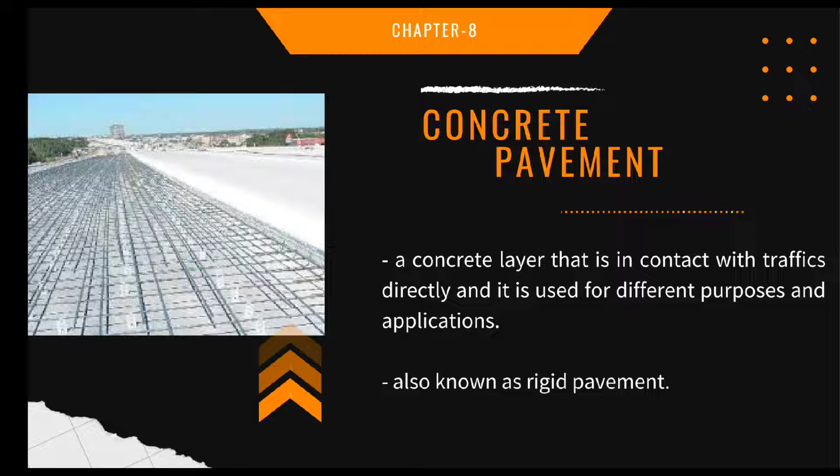Concrete pavement: a concrete layer that is in contact with traffic directly, and it is used for different purposes and applications. Also known as rigid pavement. To add, concrete pavements are used for general paving needs such as driveways, parking lots, and playgrounds.

Next slide please. So we have here the subtopics. First, Portland cement: a combination of limestone, marbles, or other calcareous materials and clay, shale, or argillaceous substances.

So there are different types of Portland cement specified by AASHTO, which means American Association of State Highway and Transportation Officials.

So first, Type 1 or 1A, air-entraining, for general concrete construction when the specified properties of the other four types are not required.

The second, Type 2 or 2A, air-entraining, for general concrete construction exposed to moderate action or where moderate heat of hydration is required. Third, Type 3 or 3A, for high strength concrete. Type 4 for low heat of hydration, and Type 5 for high sulfate resistance.

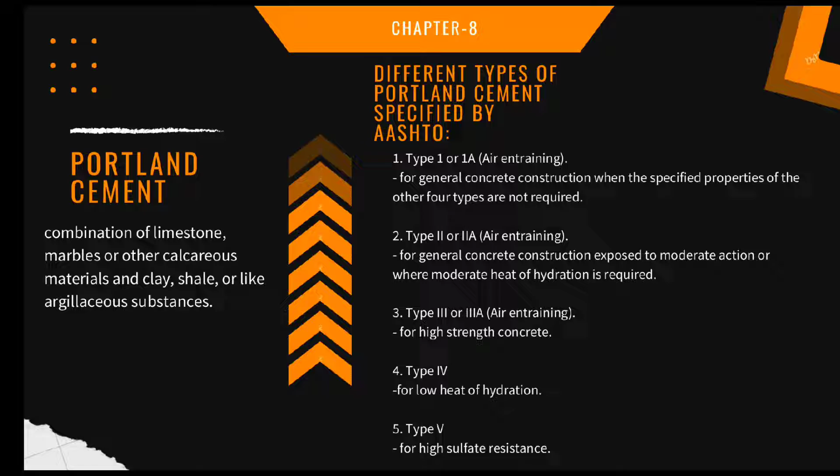Next slide please. So we have here a table showing the composition and strength characteristics of various types of Portland cement. This table you can see in our PDF, you can check it there to familiarize yourselves properly with the table.

So we have the types of cement, compound percent, strength normal, Portland cement concrete percent, in days and months. Just check it in my PDF for clarity and better familiarization.

So our notes here state that Portland cement constitutes the following chemicals: tricalcium silicate, dicalcium silicate, tricalcium aluminate, and tetracalcium aluminoferrite.

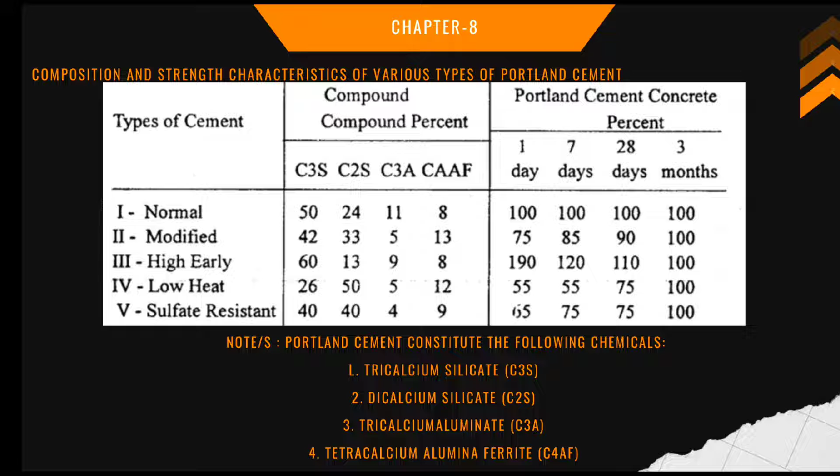Next slide please. So now we will move to the concrete pavement characteristics and behavior. First, the behavior of concrete pavement that is exposed to loading and environmental effects entirely depends upon the quality of concrete, the underlying subgrade, and the base course.

Generally, concrete is strong in resisting compression load acting on it, but considerably weak in resisting tensile stresses. The reaction and movement of the subgrade supporting the slab affects the stability of the concrete pavement.

Concrete, like other materials, also expands and contracts due to temperature changes. It expands when wet and contracts when dried. After pouring, concrete shrinks as the mortar hardens, as the cement hydrates.

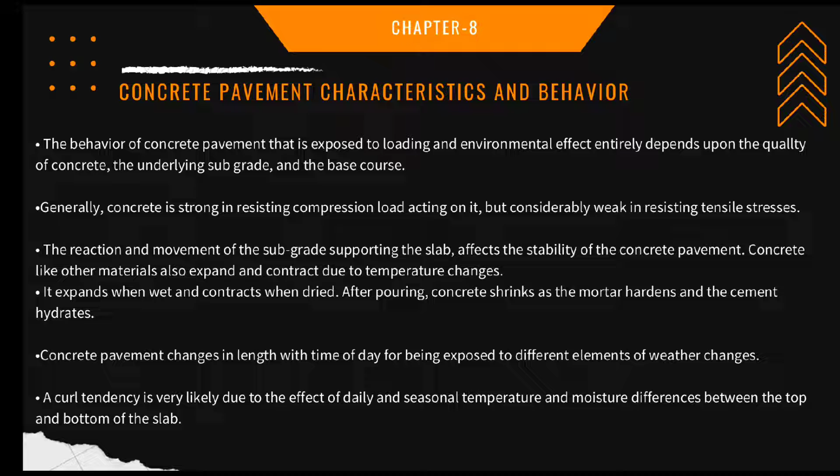Concrete pavement changes in length with time of day due to being exposed to different elements of weather changes. A curl tendency is very likely due to the effect of daily and seasonal temperature and moisture differences between the top and bottom of the slab.

Next slide please. Concrete pavement design assumes the following considerations. Number 1, that the pavement slab was designed as plain concrete beams. Number 2, that transverse cracks on the concrete pavement cannot be avoided.

The designer, however, presumes that the pavement cracks could be controlled by providing reinforcements to the slab joints with the following assumptions. So these are the sub-statements here.

A. With reinforcements, cracks on the slab will be confined to a weakened plane joint spaced at 4.50 to 6.00 meters distance. Vertical offsetting across the narrow cracks will be prevented by aggregate interlock or by dowel bars.

Third, with simply reinforced slab, cracks will only appear at weakened plane joints spaced at 12 to 20 meter intervals. Hairline cracks are held tightly by the steel between joints.

With continuous reinforcement, transverse joints are omitted. Hairline cracks are checked by the steel and develop at close intervals.

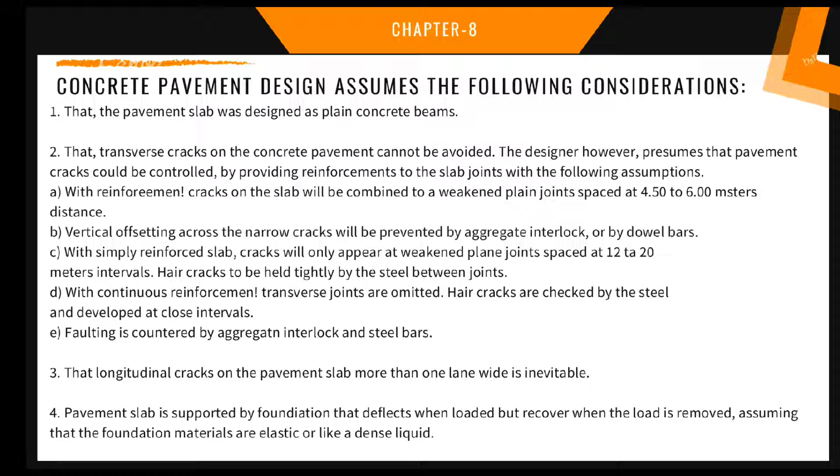So now we have here control of cracks. Load transfer and anti-joint alignment is sometimes dependent solely on aggregate interlocking. If the joint opening is considerably small, from 0.03 to 0.04 inch, the projecting aggregate is considered tightly keyed, and when the edge of one slab deflects due to load, the adjoining edge will also be forced down.

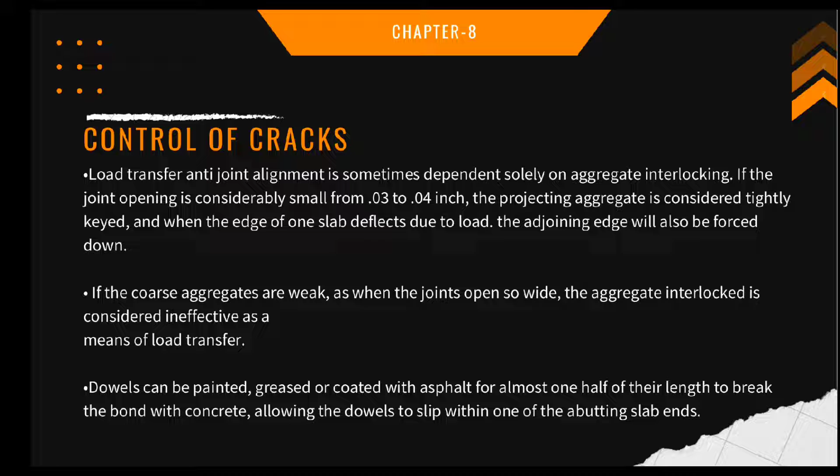Okay, next slide please. So now we have here the transverse expansion joints. Expansion joints provide space allowance for the lengthening of the slab due to expansion.

So we have here another table, the recommended dimensions of dowels for concrete pavement joints. You have here pavement thickness in centimeters, dowel diameter in millimeters, dowel length in meters, and dowel spacing in meters. Source: Interior Guide and Proposed Revision, 1980.

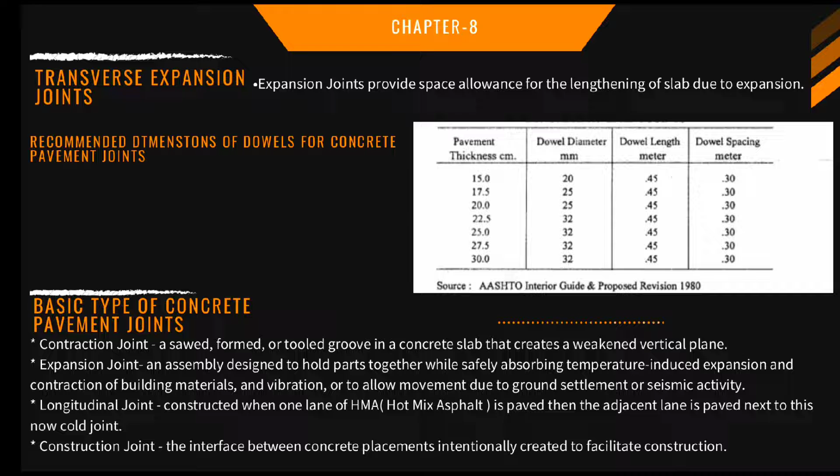So next slide please. This time I will be explaining to you more about longitudinal joints.

Longitudinal joints are provided between adjacent traffic lanes. It is considered as a hinge to provide edge support but allows rotation between the slabs. By this joint, flexural stresses that might cause irregular cracks along the length of the road are relieved or neutralized.

So longitudinal joints cannot be considered as a major problem under the following assumptions, six in total. First, that there is no big load transfer across it.

Second, that the expansion and contraction movement developed across the pavement width is very small. Third, when lanes are constructed at different times using side forms, the joints are provided with keyways in the first slab to accept load transfer.

Fourth, for longitudinal joints, deformed tie bars are used because the purpose is to hold the slabs tightly together rather than to allow the joints to open and close. Fifth, the diameter and spacing of tie bars are based on the force needed to pull the narrow pavement slab over the subgrade to the joint.

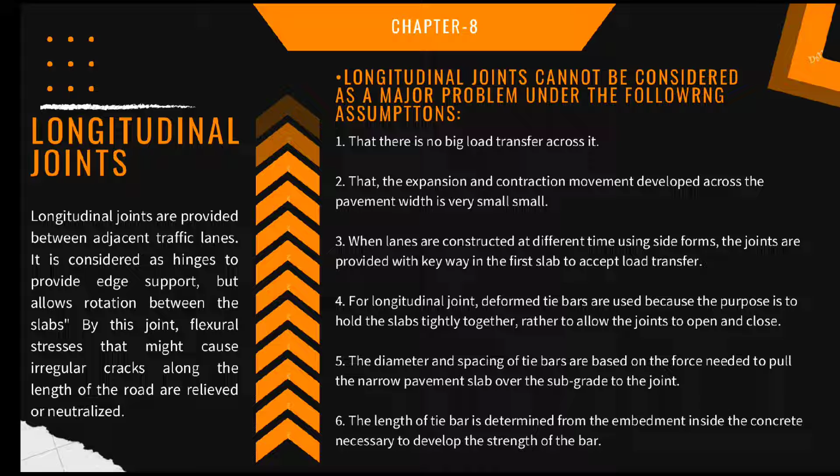Now, moving on to the 10th slide, we have here the recommended tie bars for longitudinal joints in concrete pavement, 3.60 m lane width.

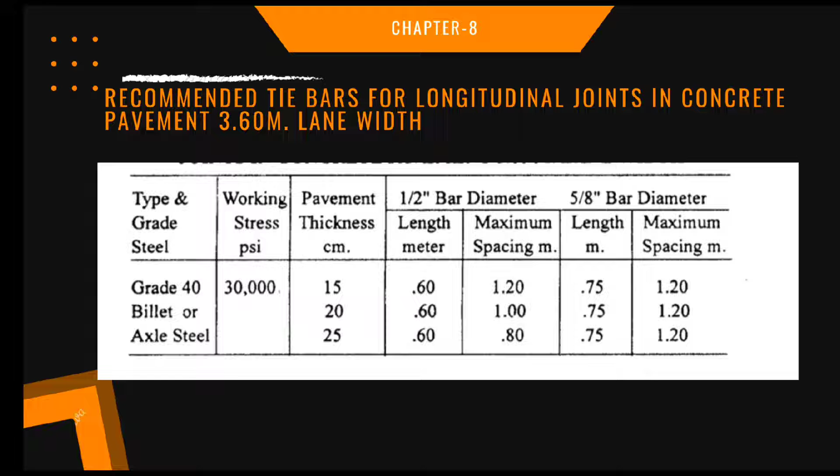Thank you, Mr. Gonzon, and hello everyone. I am Rashid Kaiser O. Kiamko. I am going to discuss first about construction joint.

What is construction joint? Construction joint is the interface between concrete placements, intentionally created as a construction joint. If concrete pouring will be interrupted for quite some time, that cold joint will be inevitable. This practice is to provide transverse construction joints.

Deformed tie bars are used to hold the joint tightly closed together. However, if the construction joint replaces a contraction joint, the use of dowels is an alternative. Construction joints and cracks should be cleaned and sealed to prevent infiltration of water to the subgrade and keep dirt out of the joints. Now, let's move on to reinforcement of joints.

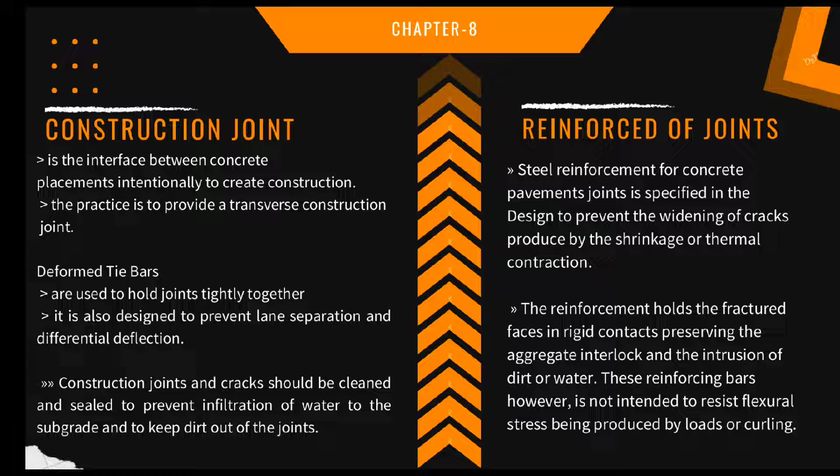Steel reinforcement for concrete pavement joints is specified in the design to prevent the widening of cracks produced by shrinkage or thermal contraction. The reinforcement holds the fractured faces in rigid contact, preserving the aggregate interlock and preventing intrusion of dirt or water. This reinforcing bar, however, is not intended to resist flexural stress produced by loads or curling. We won't dig too deep into this topic since it's more on calculation. Let's proceed to the next one.

Let's move on to the subgrade and subbase for concrete pavement. The construction standard for subgrade and embankment are precise and almost typical for all pavement types. Under concrete pavement literature, the undercourse or selected material is always imposed between the subgrade and embankment of the concrete slab. AASHTO recommends that the subbase must be extended from 30 to 60 cm outside the pavement edge to serve as edge support.

Cement-treated asphalt is recommended for the heaviest travel facility because it increases the fatigue life and reduces joint failures. The wide acceptance of stabilizing the subbase with Portland cement concrete pavement is due to investigation results of pumping of concrete slab. This pumping is all about the ejection of water and subgrade soil through the joints and cracks along the edges of the concrete pavement.

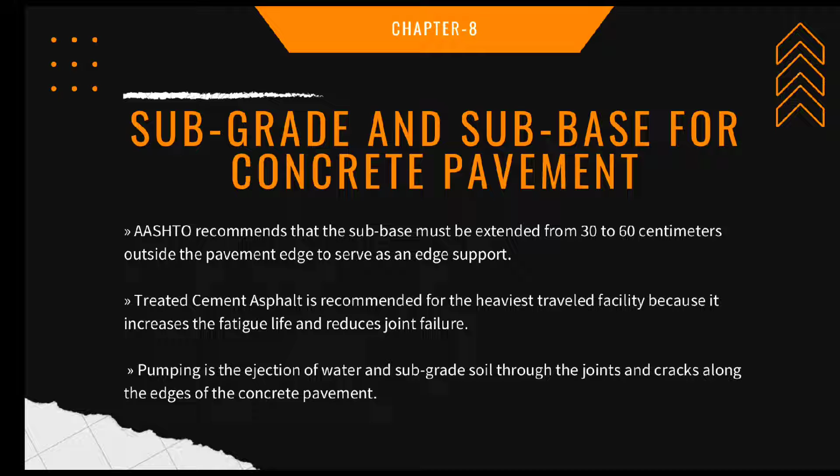Let's move on to concrete proportions. In concrete proportions, we have fundamental rules to follow so we can obtain good concrete. First, type 1 or 2 cement is specified for concrete pavement. Second, water for concrete must be clean, free from acids, alkali, and oil. Water suited for drinking purposes is acceptable for mixing cement, except water containing a large amount of sulfate.

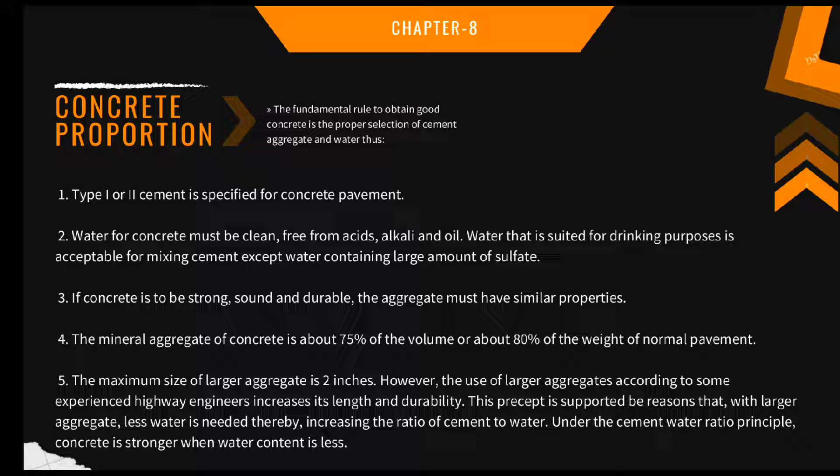Third, if concrete is to be strong, sound, and durable, the aggregates must have similar properties. Fourth, the mineral aggregate of concrete is about 75% of the volume or 80% of weight of normal pavement. Fifth, the maximum size of coarse aggregate is 2 inches. However, the use of larger aggregates, according to some experienced highway engineers, increases its strength and durability. This is supported by reasons that with larger aggregates, less water is needed, thereby increasing the cement-water ratio. Under the cement-water ratio principle, concrete is stronger when water content is less.

So let's move on to admixture. Admixture is a substance added in mixing to change the characteristic of a concrete mixture. There are varieties of admixtures available like air entraining admixture, which is very common. Others like water reducer, retarder, accelerator, pozzolan, and plasticizer are also used.

The next one is air entrainment. Air entrainment is the entrapment of air in the concrete mixture in the form of evenly distributed small bubbles. It is used to increase the concrete's resistance to surface scaling caused by de-icing with calcium or sodium chloride. Another advantage of air entrainment is improving workability and reducing bleeding in fresh concrete.

The effectiveness of air entrainment in increasing concrete durability is influenced by: number 1, percentage of air present in the mixture; number 2, grading of aggregates; number 3, size and distribution of air bubbles. Air entrainment in concrete may be attained by using air entraining Portland cement or by air entraining admixture added to each batch of concrete while mixing.

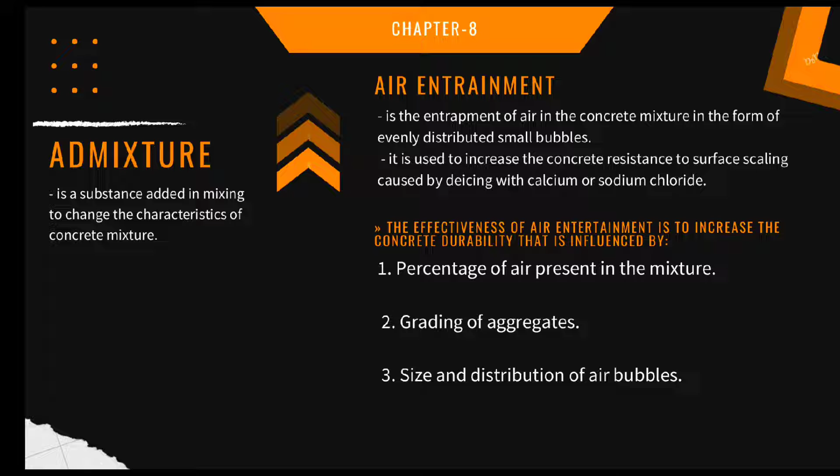Let's move on to the cement water ratio. As mentioned earlier, the strength and other desirable properties of a concrete mixture vary depending upon the ratio of cement to mixing water. A non-air entrained concrete with a water cement ratio by weight of 5 gallons of water per bag may have compressive strength about 5,300 psi in 28 days. On the other hand, a concrete mixture with 7 gallons of water per bag of cement develops strength of only 3,700 psi in 28 days.

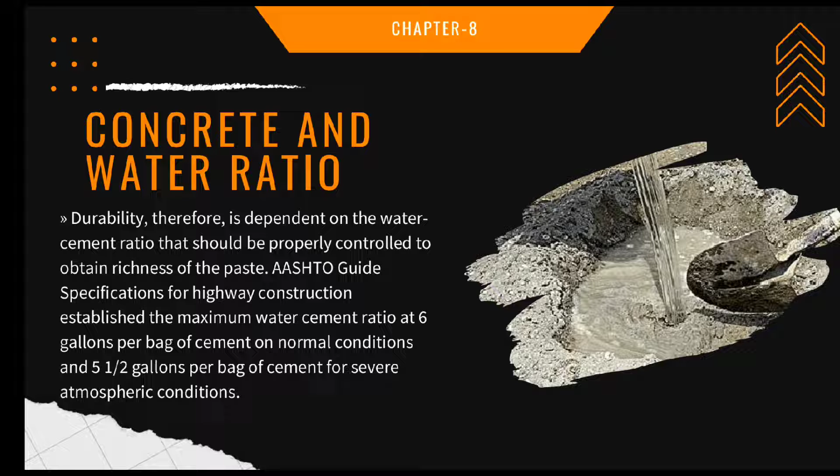Therefore, durability is always dependent on the water cement ratio, which should be properly controlled to obtain richness of the paste. AASHTO guide specifications for highway construction establish the maximum water cement ratio at 6 gallons per bag of cement for normal conditions, and 5.5 gallons per bag of cement for severe atmospheric conditions.

Let's move on to my last topic, which is the concrete mixture. Considering the high cost of cement, the objective in mixing concrete is to use more aggregates and as little cement as possible while maintaining the workability necessary for successful pouring and consolidation.

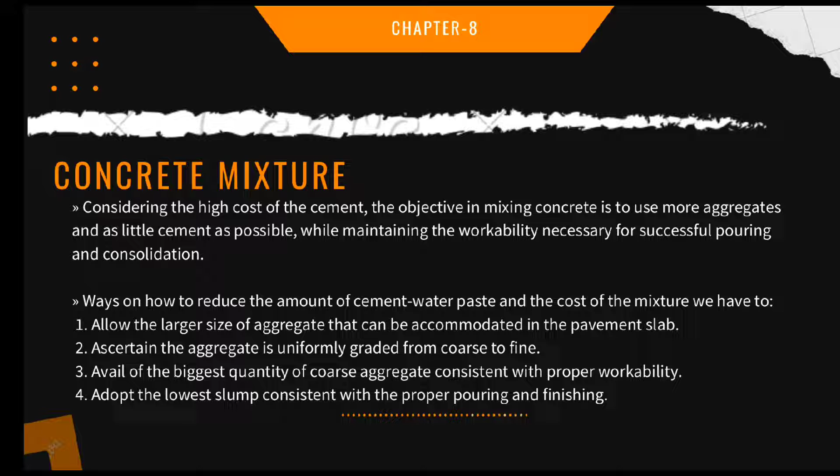So we have ways here on how to reduce the amount of cement water paste and the cost of the mixture. Number 1, allow the larger size of aggregate that can be accommodated in the pavement slab. Number 2, ascertain that the aggregate is uniformly graded from coarse to fine. Number 3, avail of the biggest quantity of coarse aggregate consistent with proper workability. Number 4, adopt the lowest slump consistent with proper pouring and finishing.

Another way of testing the consistency of concrete is the Kelly ball method. The Kelly ball method uses a metal cylinder 15 centimeters in diameter and 12 centimeters high with a hemisphere bottom shape, weighing 14 kilograms. A graduated handle rising from the top of the ball is placed on the surface of the fresh concrete. Its penetration is measured by comparing its position with that of the frame.

The advantage of the Kelly ball method is that a reading could be taken immediately on the concrete being poured on the roadway. On the contrary, the slump test requires more time but could be conducted on selected samples.

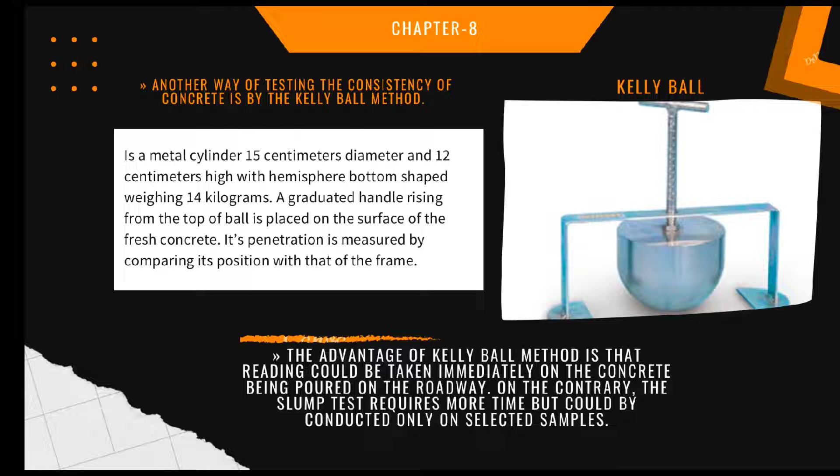Polymer concrete. Polymer concrete could be used alone or in combination with Portland cement to bind aggregates together, producing concrete. There are three types of polymer mixture. Number 1 is polymer impregnated concrete or PIC, which is a Portland cement concrete impregnated with monomer after curing. Number 2 is polymer concrete or PC, which is a mixture of polymer binder and aggregate. Number 3 is polymer cement concrete or PCC, which is a pre-mixture of cement paste and aggregate wherein a monomer is mixed before curing.

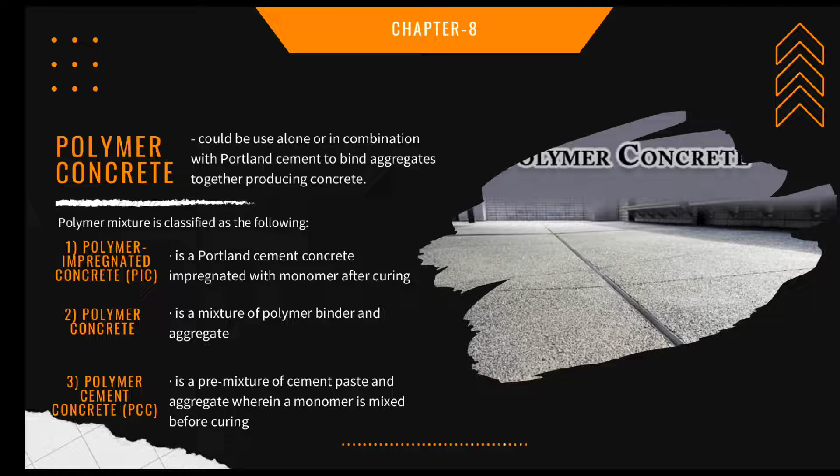Curing of concrete pavement. A newly placed concrete pavement needs curing. Curing may be accomplished by several methods, which could all be categorized into two. Number one, methods that keep the surface constantly wet or cover it with water absorbent material that is rewetted from time to time. Number two, methods that prevent evaporation, so that the water already in the concrete is retained and sufficient for hydration.

Fine aggregates consist of natural sand, stone screening or other inert materials with similar characteristics. Fine aggregates from different sources of supply should not be mixed or stored in the same pile. They should not contain more than 3 mass percent of material passing the 0.075 mm or number 200 sieve. Use of beach sand will not be allowed without approval of the supervising engineer. If the fine aggregate is subjected to 5 cycles, weight loss should not exceed 10 mass percent.

Coarse aggregate shall consist of crushed stone, gravel, blast furnace, and slag. It should not contain more than 1 mass percent of material passing the 0.075 mm or number 200 sieve, or more than 0.25 mass percent of clay lumps, or more than 3.5 mass percent of soft fragments. Coarse aggregate slag density should not be less than 1,120 kg per cubic meter.

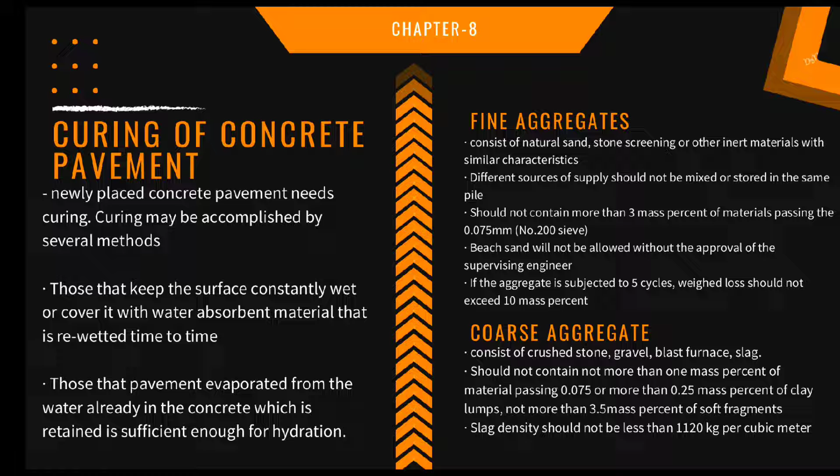Water used in concrete mixing or curing should be clean and free from oil, salt, acid, alkali, and grass. Joint fillers should be mixed asphalt and mineral or rubber filler. Storage of cement and aggregate should be waterproof with a raised floor from the ground to protect from rain or dampness.

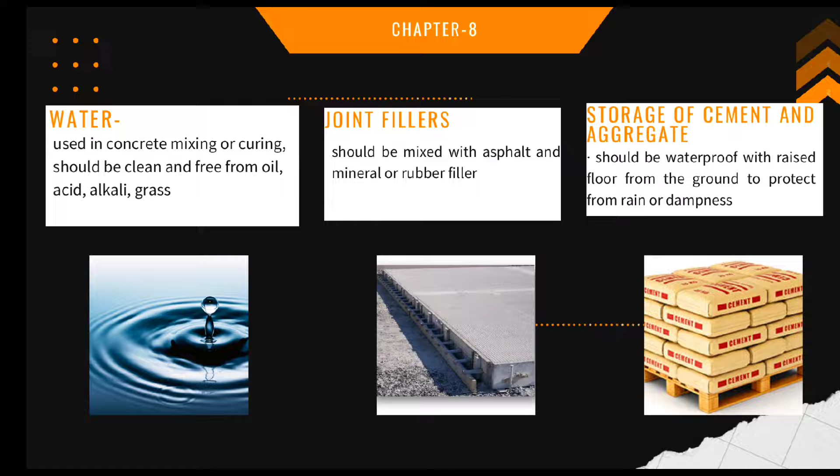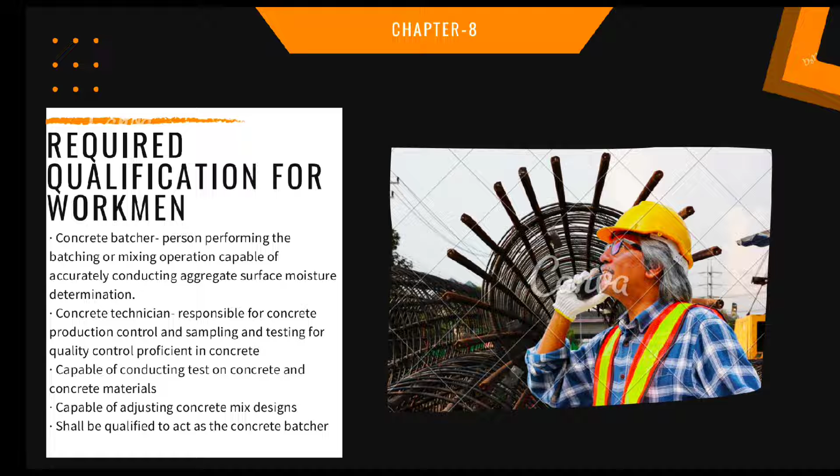Required qualification of workmen. There are two types. First is the concrete batcher, the person performing the batching or mixing operation, capable of accurately conducting aggregate surface moisture determination. Second is the concrete technician, a person responsible for concrete production, controls, sampling and testing for quality control, proficient in concrete. The concrete technician also needs to be capable of conducting tests on concrete and concrete materials, capable of adjusting concrete mix designs, and shall be qualified to act as the concrete batcher.

Equipment necessary for handling materials and performing all phases of the work shall be approved by the supervising engineer as to design, capacity, and mechanical condition. Batching plant equipment efficiently combines the various ingredients to mix concrete: sand, aggregate, water, air, and cement, mixed at different ratios. Batching plant equipment should include bins, weighing hoppers, and scale for the fine aggregates. It should also be equipped with a suitable non-resettable batch counter and automatic weighing devices.

Next is the mixers. Mixing at the site of construction should be done in an approved mixer capable of combining the aggregates, cement, and water. Truck mixers are used for mixing and hauling concrete. Truck agitators are used for hauling central mix concrete. For non-agitator trucks, the bodies of non-agitating hauling equipment for concrete shall be smooth.

Next is paving and finishing equipment. Concrete should be placed and set with an approved paver designed to spread and consolidate it. The concrete saw should have a water-cooled diamond edge saw blade.

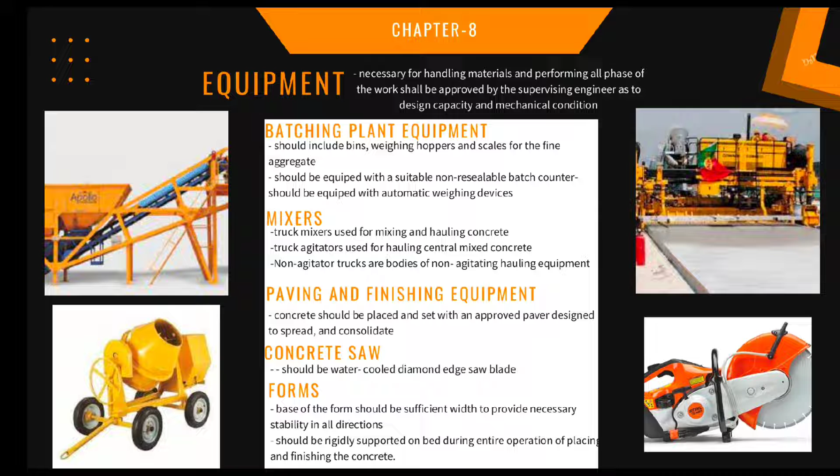Forms. The base of the form should be of sufficient width to provide necessary stability in all directions. The form should be rigidly supported on the bed during the entire operation of placing and finishing the concrete. Setting of forms: the base support foundation under the form should be hard and true to grade so that the form, when set, will be firmly in contact along its whole length at the specified grade.

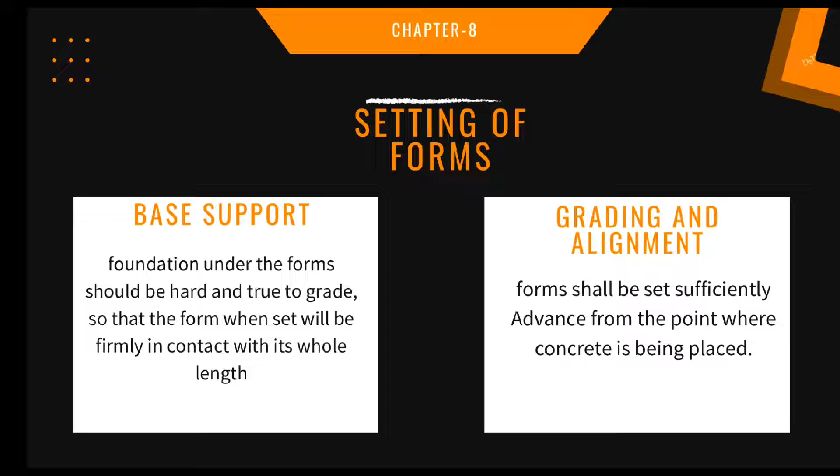Grading and alignment: the form shall be set sufficiently advanced from the point where concrete is being placed.

Good morning everyone, let's proceed to the preparation of grade. After the base or subgrade has been placed and compacted to the required density, the areas that will support the paving machine and the grade on which the pavement is to be constructed should be trimmed to the proper elevation by means of a properly designed machine, extending the work at least 60 centimeters beyond each edge of the proposed concrete pavement.

Let's proceed to the setting of forms. First is base support: the foundation under the forms should be hard and true to grade so that the form, when set, will be firmly in contact with its whole length at the specified grade. Second is grading and alignment: the form shall be set sufficiently advanced from the point where the concrete is being placed.

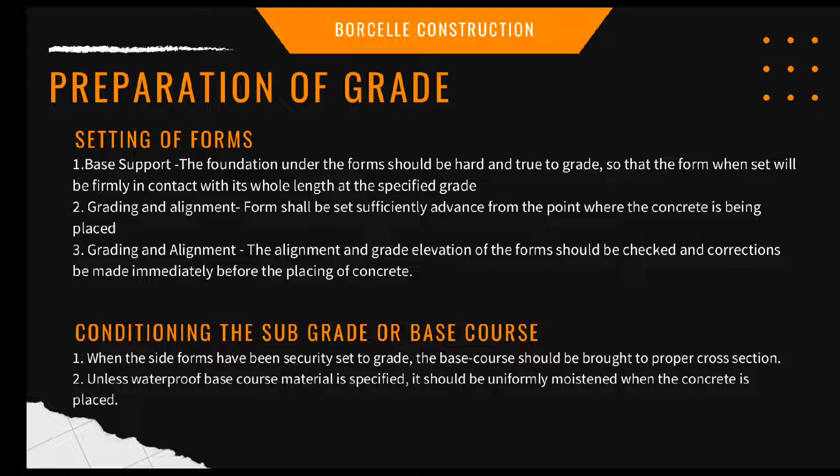Third is grading and alignment: the alignment and grade elevation of the form should be checked and corrections made immediately before placing the concrete. For conditioning the subgrade or base course: first, when the side forms have been securely set to grade, the base course should be brought to the proper cross section. Second, unless a waterproof base course material is specified, it should be uniformly moistened when the concrete is placed.

So let's proceed to handling, measuring, and batching of material. The batching plant and the equivalent layout must provide a smooth flow of continuous supply and transport of materials to the work. So in mixing concrete, ready-mix concrete shall be mixed and delivered in accordance with AASHTO M-157 requirements.

The mixing time should not be less than 50 seconds nor more than 90 seconds. The volume of the concrete should not exceed the mixer's nominal capacity. The batches shall be charged into the drum with a portion of the mixing water. The throat of the drum shall be kept free of concrete accumulation.

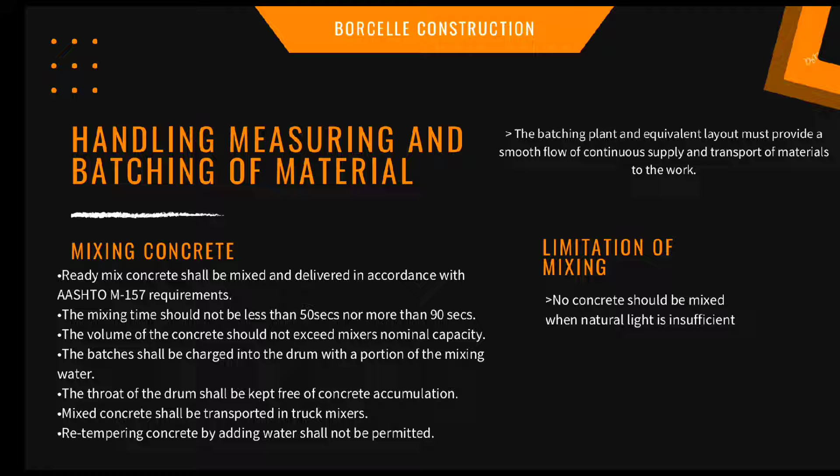Mixed concrete shall be transported in truck mixers. Retempering concrete by adding water shall not be permitted. Limitation of mixing: no concrete should be mixed when natural light is insufficient.

Next is placing or depositing of concrete. Concrete is deposited in such a manner requiring minimal rehandling, placing concrete between transverse joints without the use of intermediate bulkheads.

Concrete is to be placed adjoining a previously constructed lane, with mechanical equipment operated upon the existing lane. The previously constructed lane must have attained the strength of 14-day concrete. Vibrators should not be allowed to come in contact with the joint assembly, grade, or side form. Concrete should be deposited as near as possible to the expansion and contraction joints without disturbing them.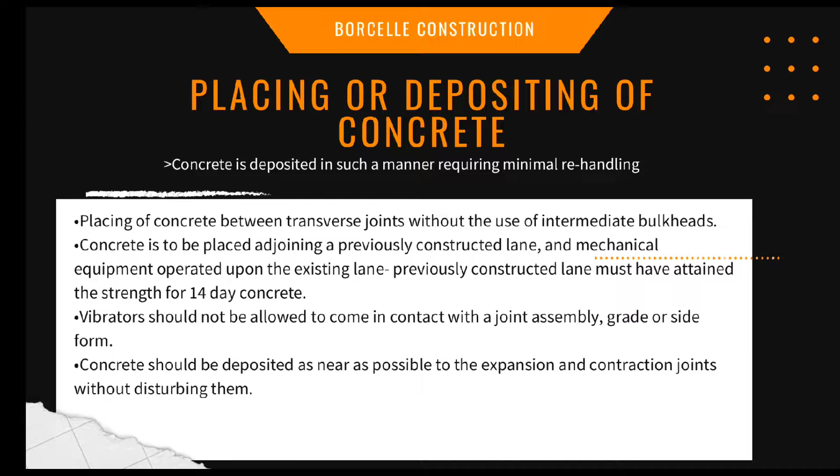Concrete joints are constructed according to the type, dimensions, and location as indicated on plans or special provisions. So concrete pavement joints are classified into longitudinal joint, transverse expansion joint, and transverse construction joint.

A load transfer device is provided along the longitudinal centerline of the pavement, either by tongue and groove concrete or by steel dowels, but with considerations.

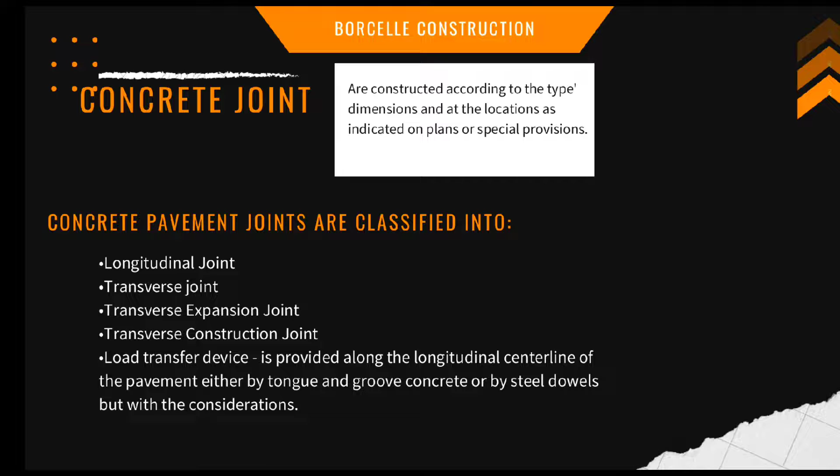Next is final consolidation and finishing. The sequence of operations after placing the concrete at grade is strike-off or consolidation, floating, and removal of laitance, edging, and final surface finishing.

Examples include finishing machine, hand finishing, floating, straight edge testing, and surface correction. Final finish, edging at forms and joints, and surface test.

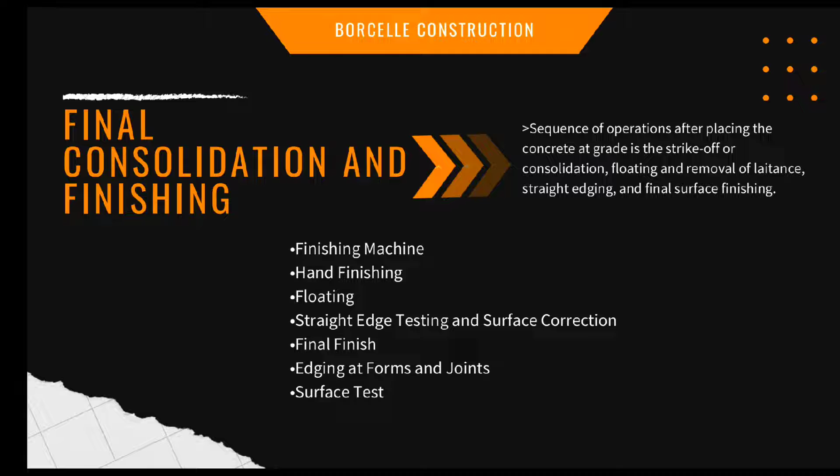Curing: immediately after the finishing operation and the concrete has sufficiently set, the entire surface of the newly placed concrete is cured in accordance with one of the following methods.

First, the use of cotton or burlap mats. The pavement surface is entirely covered with mat thoroughly saturated with water. The mat is placed and weighted to remain in intimate contact with the pavement and maintained fully wet in position for 72 hours unless otherwise specified.

Second, the use of waterproof paper. The top and sides of the pavement are covered entirely with waterproof paper. The units are lapped at least 45 centimeters, placed and weighted down to remain in intimate contact with the surface cover. Joints are securely sewed or cemented together so as not to open up or separate during the curing period. The cover should be maintained in place for 72 hours after the concrete has been placed. The surface of the pavement is thoroughly wetted prior to the placing of the paper.

Third is straw curing. When straw is used for curing, the pavement is cured initially with burlap or cotton mats until after the final set of concrete, or in any case 12 hours after placing the concrete. As soon as the mat is removed, the surface and sides of the pavement are thoroughly wetted and covered with at least 20 centimeters of straw or hay, measured after saturation with water, to last for 72 hours.

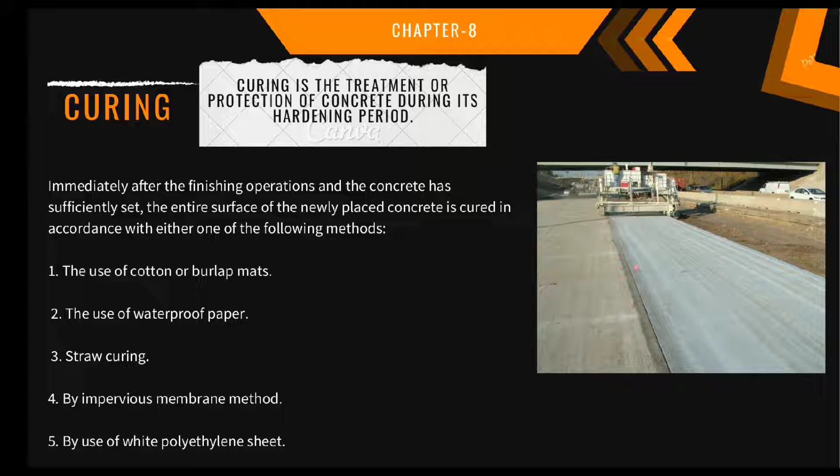The top surface and sides of the pavement are entirely covered with white polyethylene sheet. The units are lapped to at least 45 centimeters, placing the sheet to remain in contact with the surface covered. The sheeting should extend beyond the edge of the slab at least twice the thickness of the pavement. The covering should be maintained in place for 72 hours after the concrete has been placed.

Removal of forms. Forms for concrete pavement should remain in place undisturbed for 24 hours after pouring. The removal could be done as follows.

First, crowbars are used in removing forms, pulling out nails and pins, but care should be exercised not to break the pavement edges. Second, in case a portion of the concrete slab is spalled off, it should be repaired immediately with fresh mortar with a mixture of 1:2. Third, major honeycomb areas will be considered defective work to be removed and replaced.

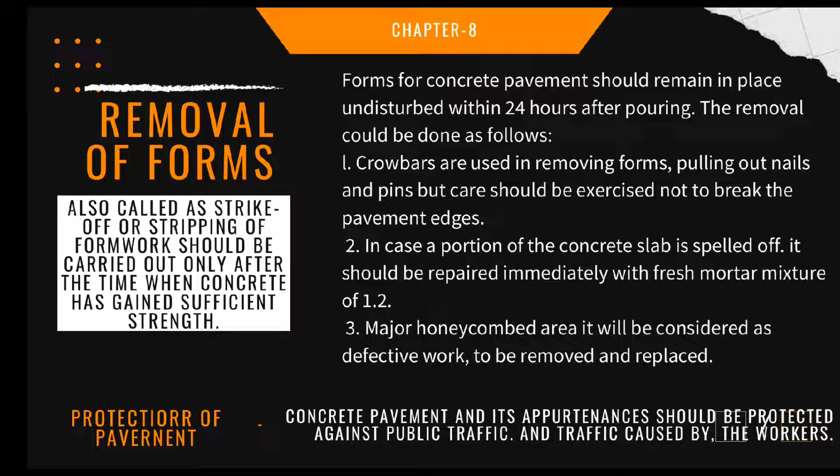Protection of pavements. Concrete pavements and their appurtenances should be protected against public traffic and traffic caused by the workers. Protection of the pavement includes the posting of watchmen to direct traffic and the posting and maintenance of warning signs, lights, pavement bridges or crossovers, etc. Any damage to the pavement prior to the final acceptance of the work shall be repaired or replaced depending upon the extent of the damage.

Concreting by the slip form method. If the contract calls for the construction of concrete pavements without using a fixed form, the following shall apply.

The grade. After the grade or base have been placed and compacted to the required density, the areas to support the paving machine are cut to proper elevation by means of a properly designed machine. The base on which the pavement is to be constructed is brought up to the proper profile. If the density of the base is disturbed by the grading operation, it should be corrected by additional compaction before the pouring of concrete. The grade or base should be prepared sufficiently in advance of the concrete pouring. If any traffic is allowed to use the prepared grade, it shall be checked and corrected immediately before the placing of concrete.

Next is placing of concrete. Concrete is deposited inside the form using the approved slip form paver designed to spread, consolidate, screed, and float finish the freshly placed concrete in one complete pass of the machine, in such a manner that minimum hand finishing is obtained, yet providing a dense and homogeneous pavement in conformity with specifications.

The machine vibrates the concrete full width and depth of the strip being placed. Vibration is accomplished by a vibrating tube or arms working in the concrete, or with a vibrating screed or pan operating on the surface of the concrete.

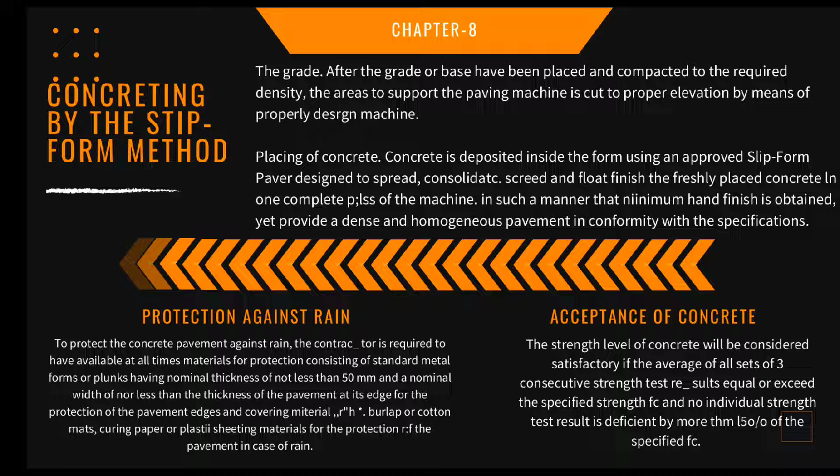Concrete which does not satisfy the above criteria may be rejected unless the contractor can provide evidence, by means of a core test, that the quality of concrete represented by the failed test result is acceptable in place. At least 3 representative cores are taken from each member or concrete area in place that is considered deficient. Core location should be determined by the supervising engineer so that there will be least impairment of the strength of the structure.

The obtaining and testing of drilled cores shall be in accordance with AASHTO T24 requirements. Concrete in the area represented by the core will be considered adequate if the average strength of the core is equal to at least 85% of Fc prime, and if...

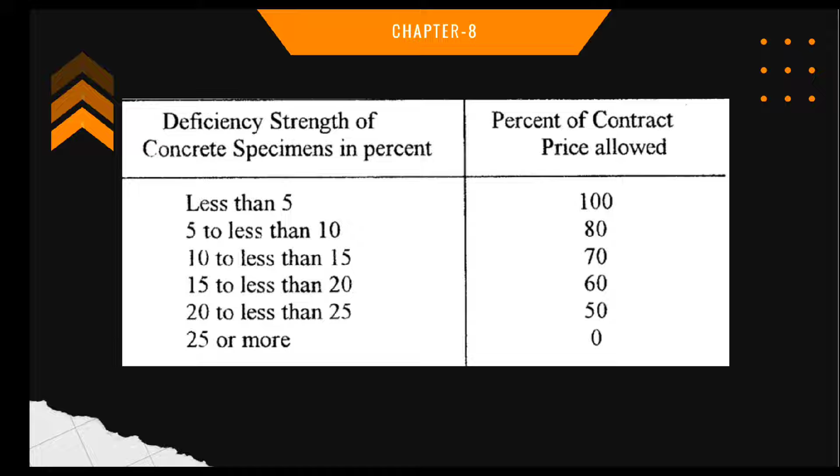no single core is less than 75% of the specified strength. If the strength of the controlled specimen does not meet the requirement, and it is not feasible or not advisable to obtain a core from the structure due to structural consideration, payment of concrete will be made at an adjusted price due to strength deficiency of concrete, as specimen are specified.

Tolerance in pavement thickness: thickness of the pavements will be determined by measuring the core from the completed pavements in accordance with AASHTO T148 requirements. First, the completed pavements will be accepted on a lot basis. A lot is considered 1,000 linear meters of pavement slab when a single traffic lane is poured, or 500 linear meters when two lanes are poured concurrently.

Second, the last unit in each slab constitutes a lot in itself when its length is at least one half of the nominal lot length. Third, if the length of the last unit is shorter than one half of the nominal length, it should be included in the previous lot. Fourth, other areas like intersections, entrances, crossovers, ramps, etc. will be grouped together to form a lot.

Each lot will be divided into 5 equal segments, and one core will be obtained from each segment in accordance with AASHTO T24 requirements. Pavement thickness: it is the intent of this specification to set pavements to a uniform thickness as planned for the average of each lot as defined.

1. In calculating the average thickness of the pavement, individual measurements in excess of the specified thickness by more than 5 mm, and measurements less than the specified thickness by more than 25 mm, should not be included in the average thickness. 2. When the average thickness of the lot is deficient, the contract unit price will be adjusted to the thickness in accordance with the paragraph below, adjustment for thickness.

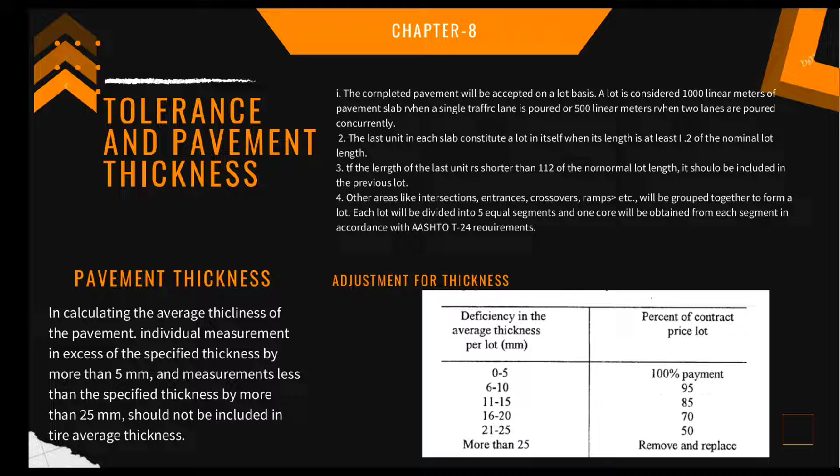Methods of measurement: the area to be paid under this item is the area in square meters of concrete pavement placed and accepted as completed pavement. The length is measured horizontally along the center line of each roadway or ramp. Curb and gutter will be included in the area of concrete pavement measured.

Next is opening to traffic. The project engineer will decide when the pavement may be opened to traffic. The road will not be opened to traffic until after test specimens, molded and cured in accordance with AASHTO T24, have attained the minimum strength requirements.

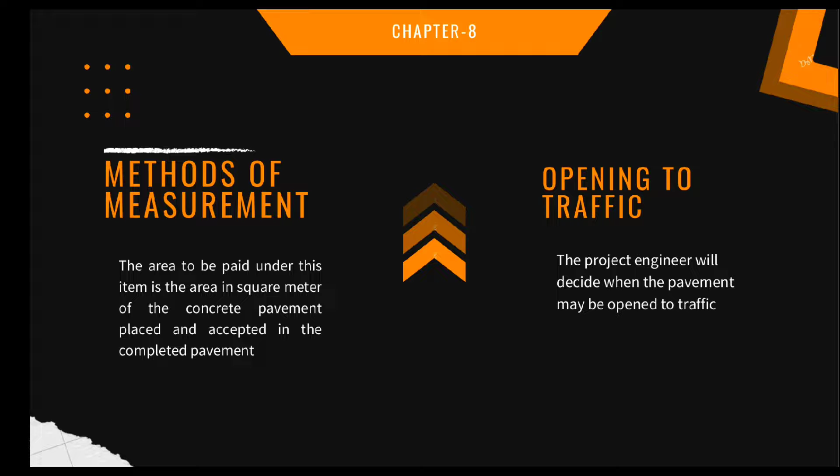If such tests are not conducted prior to the specified age of the concrete, the pavement will not be open to traffic until after 14 days from the time the concrete was placed. Before opening to traffic, the pavement shall be cleaned and joints completely sealed.